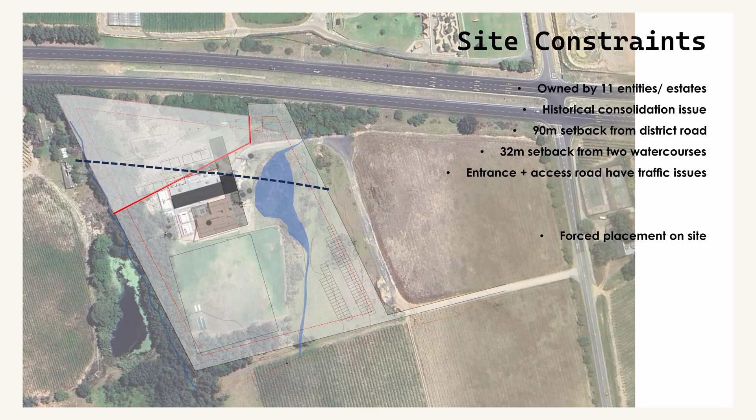What they wanted was extra classrooms, but also staff facilities. Given the nature of the organization, the budget was extremely low. We didn't get a specific budget—they just said it's more important that the kids get the best education even if it's under a tree. That's the priority, and that's where the main funding will go. The building must accommodate their needs, but it should be very cheap.

So our approach was all about optimization, and there were quite a few things we were trying to optimize—I'll get into that now with the slides. Basically the first thing is we looked at what materials can we use that's really affordable, but use it in a different way that makes it specific, not just the standard thing applied throughout. So we used very basic normal materials in an intentional way, which communicates care.

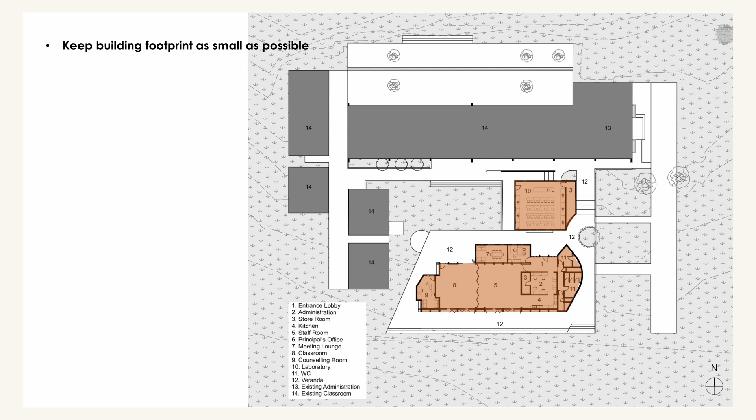There's one rigid function here, which is a science lab, and then this side is primarily the admin area, or staff area, and this side is another class area, but with a divider in between to make it a joint space. If they need to accommodate more people, they open that up and it acts almost like a school hall. We created very large verandas around the whole building envelope.

That was for two reasons. The one reason is obviously you need thresholds—going from the outside, which is a farm area, to the inside, which is a much different space. So transitioning from the outside landscape area to the inside, which is now a school institutional area, we wanted to make sure the transition space is big enough to be functional.

So the space here became almost like a big internal foyer. There's a screen wall, a block screen wall that runs down there, and that space became the transition space, which is the foyer to the main entrance of the admin. It's important for that change, for differentiating the inside from the outside. And secondly, it's just spill-over space.

These facades open up to both sides to spill over onto the large veranda, so it becomes very useful. Also, the way it's orientated to the sports fields, with the big terrace and steps going down here—they actually use the veranda and the steps as an assembly area, so somebody stands here and addresses the whole school sitting on the veranda and the steps.

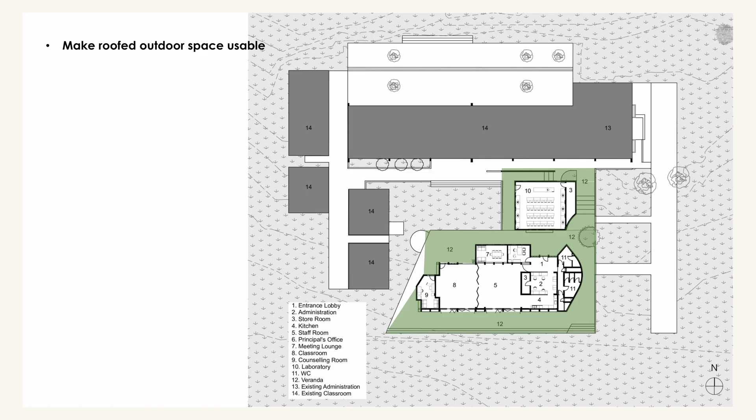Design principles—okay, as I said first. Obviously a very important thing is the spaces, but I'm not going to dwell on that too much. There's obviously now the outside. We usually design the building by first identifying the outside spaces, and then place the buildings around those spaces to define them and live out on them. The sketch here was the initial planning, but that's for phases to come, which I don't think will happen, but that's how it usually goes.

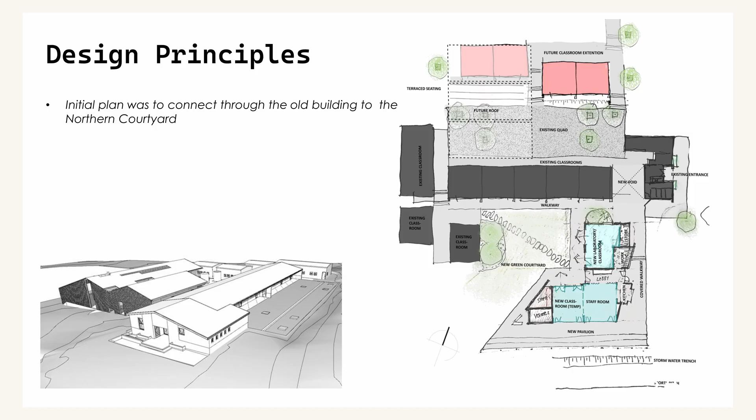The second important thing: you sit with this brief to just accommodate these functions, but it's a school, a new organization—there's an identity that's needed in the facility, and we felt it's important to give a very strong figure to the facade. It's just a very simple roofscape, repeating almost the roof rhythm that is there and continuing it very simply on the same plane.

It also relates to the roofs in the area, because you kind of look down on the site as you drive around it. The side steps down to increase the volume from the science lab on this side to the more public functions on the lower end of the block. Here you can see the screen wall with that threshold space, the outside foyer created between the two spaces. And here you can see just a model of the roof structure.

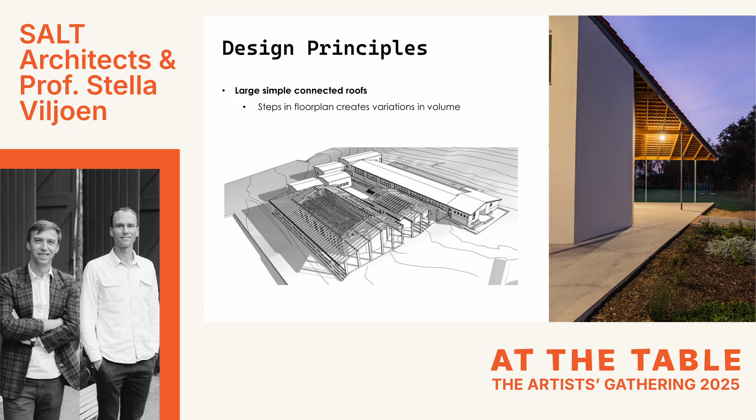The roof in our work is one of the most important elements of the architecture because it's almost the element that you as a person relate the most to shelter. It's the thing that shelters you. So we often, when we work on a design, try to really focus on making the roof as simple and as straightforward as possible.

Here you can see another photo of that space. And the light quality, because the screen faces east, so in the mornings when everybody arrives at school, it gives a really remarkable atmosphere, with the sun coming through the screen.

So in order to make the building belong in that setting that's so landscape dominant, we made a small opening for the garden also to move into the building. So you've got the human scale opening here, and then there's a small opening there for the garden to move in.

And then you can just see some more photos. There's a few specific cutouts in the roof to get light into the spaces that ended up being a bit more deep. And then you've got a view to Helderberg Mountain.

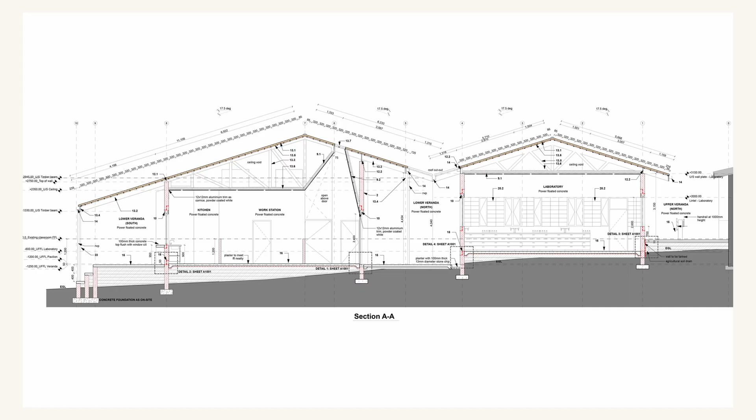Quickly on the sections - the way that light comes into a building is obviously crucial to create the atmosphere on the inside. So with the building plan footprints being so deep, we just shaped the roof trusses a little bit different to have roof or skylights to get light into these deeper spaces.

So there you can see what that looks like - it's an angled ceiling against the truss, and then the light comes. And the reflection against the timber is very nice, it makes the light much warmer with the yellow tone. So there you can see what that looks like.

The furniture is what they got donated, what somebody donated to them. So we didn't have any say on that, but it's kind of part of their story and who they are, and that's part of them. It doesn't help to try and curate that as well.

So currently this is now used as a staff room, and then there's a meeting breakout room, and then there's a classroom on the opposite side of this door, and then it can be opened up to be kind of a venue like that.

Okay, the next project is something completely different. It is a water treatment facility for the city of Cape Town. So it's an infrastructure project that engineers did the plant design, the whole technical thing, and then we were just asked to do - well, they usually just ask you to choose the bricks and the paint colors, but they actually said it must be a nice environment, there must be an office, and we must say what the facades and the envelope of the building must be like.

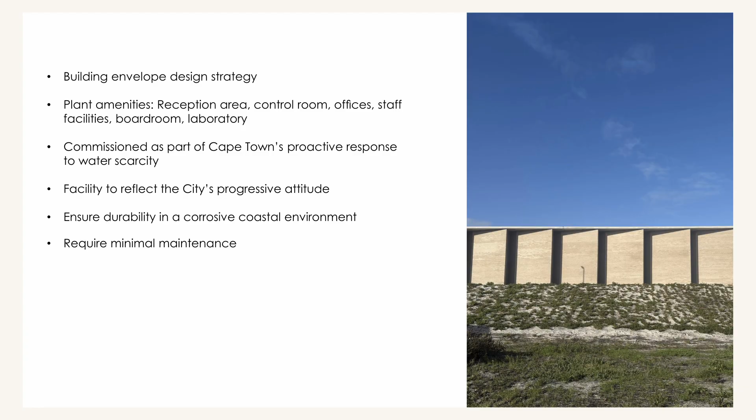Obviously, it's designed on these 4 platforms that step down from high to low, so the water flows from high to low. So the hydraulics of the design means you literally draw a line, because that line says if something's higher than that, the water won't go over, and if it's lower than that, the water goes over. And so it goes down through the filters to one of these pump stations at the bottom where it gets pumped back.

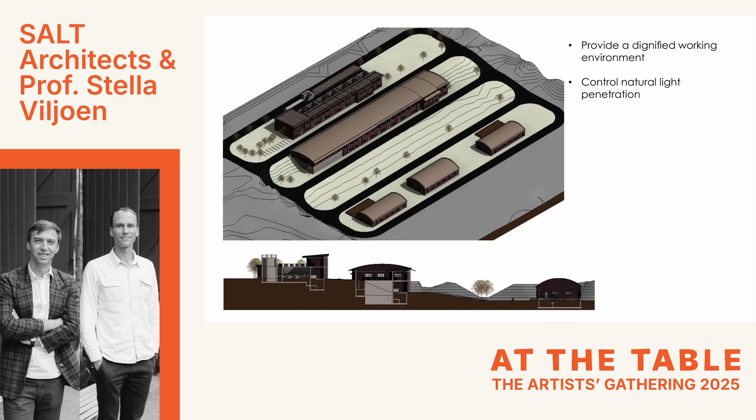So all the engineers told us is they want a dignified working environment for the people. That means it's all these filters with the shed roof over, so it's very industrial. That means just putting windows in, so there's natural light. And then there's a lot of water in it, so algae grows as it gets light, so the light must be controlled, there mustn't be too much light, otherwise there's a maintenance issue.

So obviously when we get into a context like that, or any context, we always ask ourselves firstly, how does it fit into the urban setting, or what is it if we zoom out? What influence or what improvement will that thing you do have on the environment? Or at least how will it be read and used and interpreted in conjunction with that?

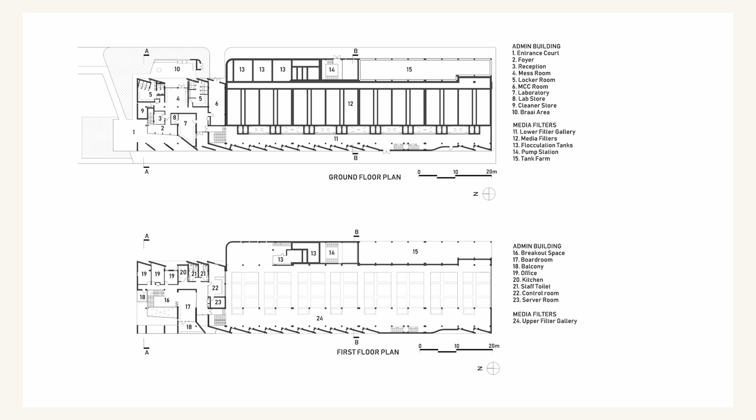Another thing I didn't mention about our design process, which is important for us, is this creating of good spatial qualities. Spatial qualities that is something more specific, especially in terms of the volume and the light that gets into the space.

On the plan for the admin building, you enter on this platform. This platform continues throughout the whole length of the plant building. It starts here, and the screen wall here is pulled loose from the facade, so this is almost like a cavern that you walk into.

This is a glass facade then with a front door where you come into the foyer. So this space has then got a...

Very specific dynamic with that screen wall that protects you from the very machine-dominated environment. But it also has just a few specific moments with the light that comes in, and then it makes it very inviting to come into here where the reception is.

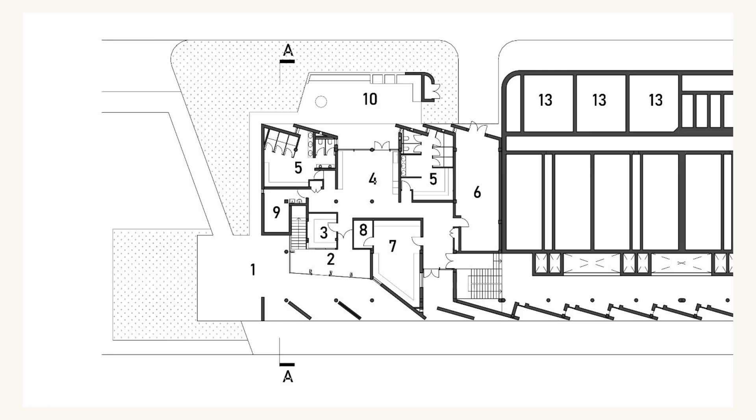This door on the ground floor is the blue collar side, so that's all the locker rooms, the mess facilities for the staff, the braai area for the staff, which is always important on a plant, and then the laboratory here.

And then you go upstairs, up the stairs to this side. So here you're now on top of the admin in this double volume that looks down, and from here you kind of look out over the view.

And it's got a big boardroom, where they want to impress all the possible investors, and it's got a balcony with a view. It's also connected visually to the control room, which has a window over the plant, the filters of the plant here, so that everybody can kind of read how the building works when you're in it.